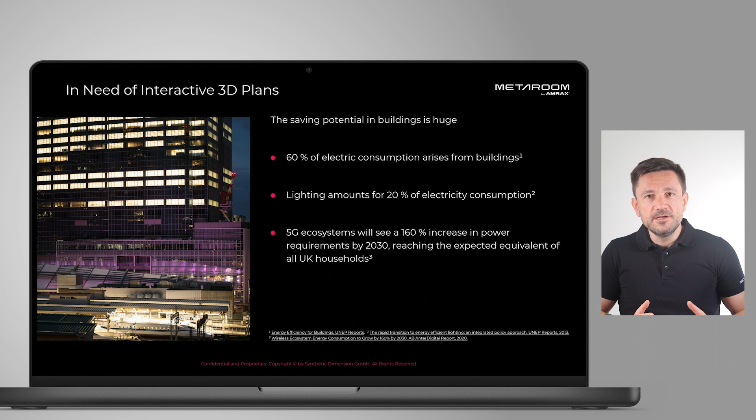In addition, we also consume a lot of energy via wireless networks, which is usually completely invisible and unrecognized by us. 3D plans help us enormously in understanding and simulating these energy consumers.

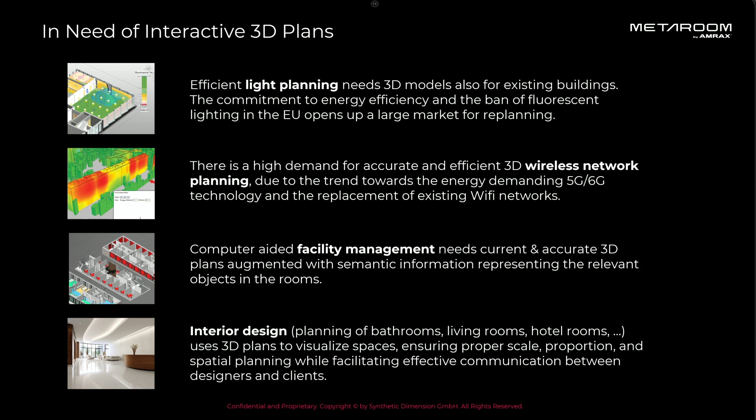So we can see this 3D data from buildings can be highly useful, not only for lighting, but also for many other areas, such as wireless network planning, facility management, and of course, various interior design applications.

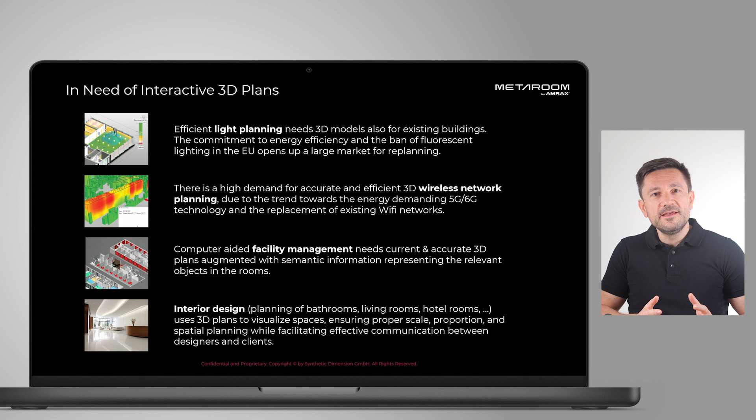Before we delve deeper into BIM and 3D capture, I would like to briefly discuss the distinction between BIM and other 3D data. I think it helps with further understanding and it also creates a focus. Let's take a close look at BIM.

Here we see at the top of the list of advantages that we are standardized, which is also the biggest advantage of all. Work has been underway to standardize BIM since 1997, and the latest version, IFC 4.3, has been official ISO standard since 2nd April 2024, making it the global standard.

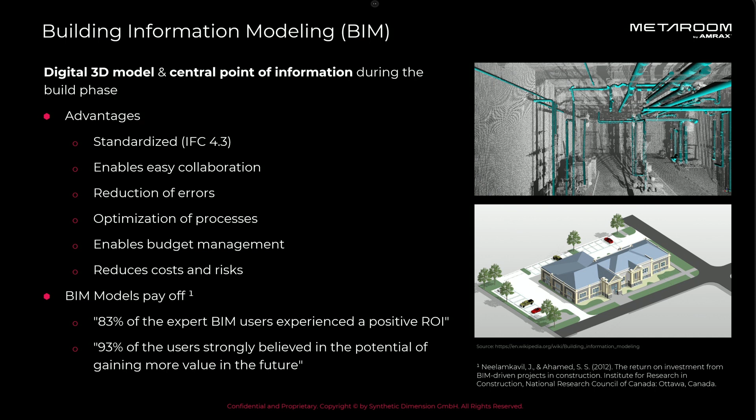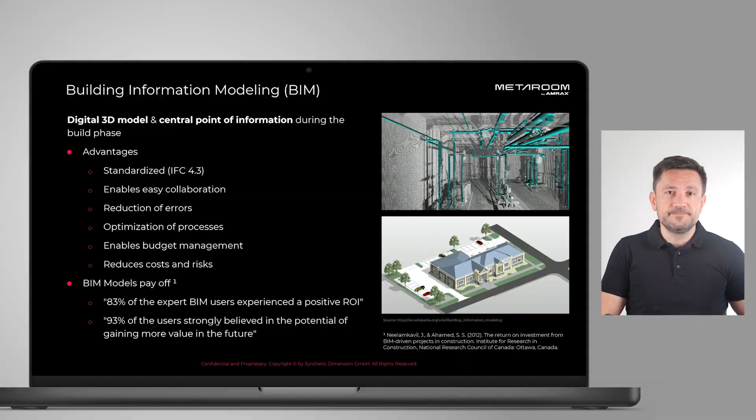The second item on the list is collaboration, which has many more positive effects, such as reducing errors and optimizing processes. And of course, this also pays off in terms of financial aspects. BIM literally saves money. Now, let's jump to one of the most important aspects, opportunities and challenges.

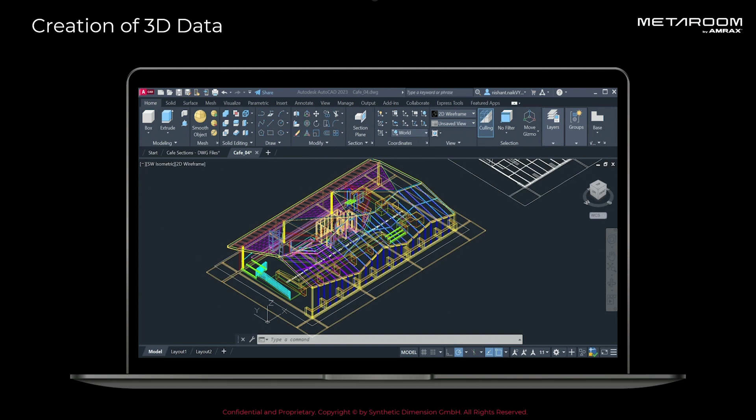As every new technology also comes with both sides of the medal, I think everyone knows such images, lots of icons, complex software. Almost every 3D process today is in extreme need of training and requires experts. The software packages can do almost everything, but can we do as much?

I once saw a study that we use an average of 2 to 4% of the features that Microsoft Word offers. I don't think it will be much different here, but sometimes you need just that one special feature.

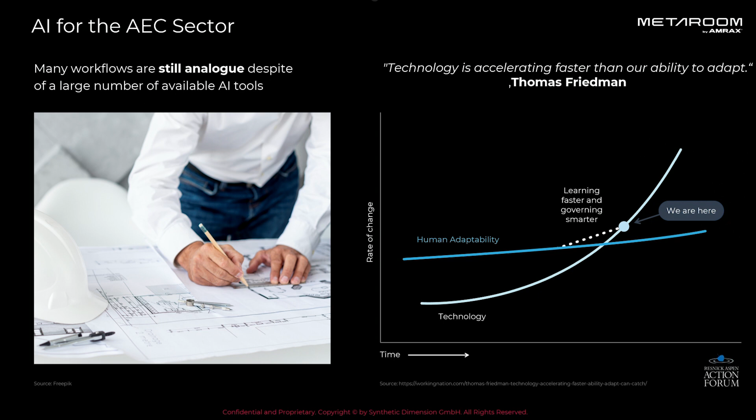We can also see that AI is also making its way into the field of buildings, and of course, into the field of lighting and lighting design. It feels a bit like so much is happening in the AI sector that we as humans can barely keep up. In the picture on the right, you can see a curve that I really like.

But the good thing is that AI not only makes things better, it also can make them easier.

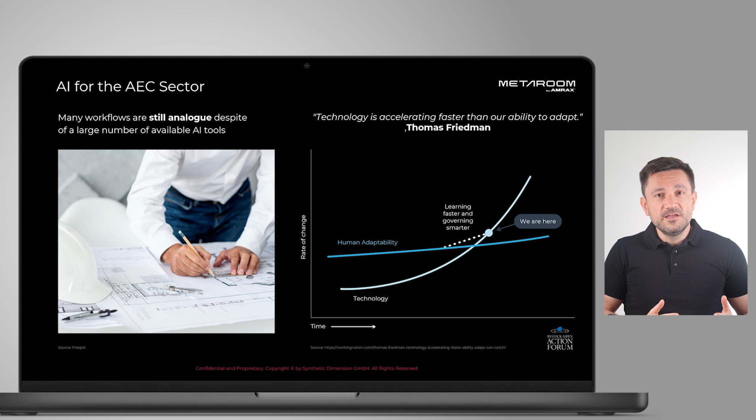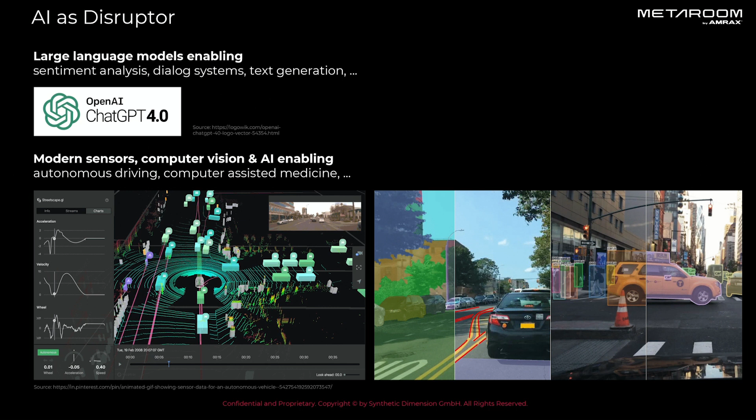In addition to large language models, I think everyone will have heard about ChatGPT. A lot has also happened in the field of machine vision. AI in the recognition of objects, but also in the estimation of depth, in other words, the third dimension, has been around for much longer.

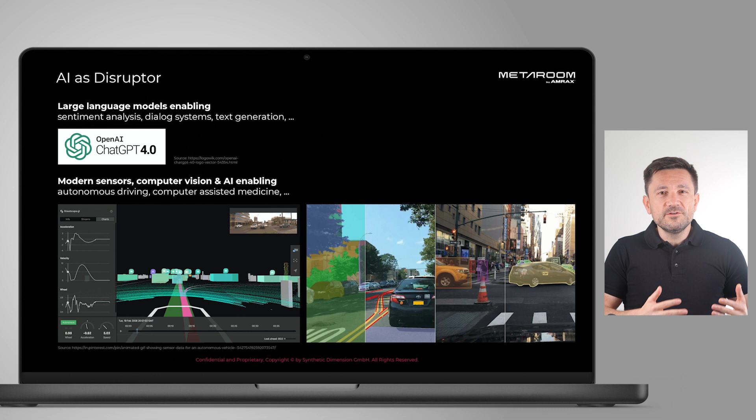You can imagine what I'm about to show you as the autopilot of a state-of-the-art vehicle, only on a cell phone.

The app I'm showing you now, METAROOM, can be downloaded for free on the App Store. So you can also give it a try on your own. Let's start a new scan together.

Right at the start, the system automatically recognizes walls, windows, tables, chairs. A total of 16 classes of objects. However, much more information is calculated in the background, such as the reflectance of walls, which plays a major role in lighting design. Typically, a scan of one room takes around 2 to 3 minutes.

There is no training necessary, but a bit of experience helps, like doing a couple of scans before we go out in the wild. We also record the 4 positions where existing luminaires are located. We can already see this in the overview, displayed as green icons.

Now we have successfully digitized one room. Basically, it can be said that there are no hard limits for the size of the recordings. It can be used to record entire floors and buildings. Now we jump into METAROOM Studio and take a look at the scan we have made together.

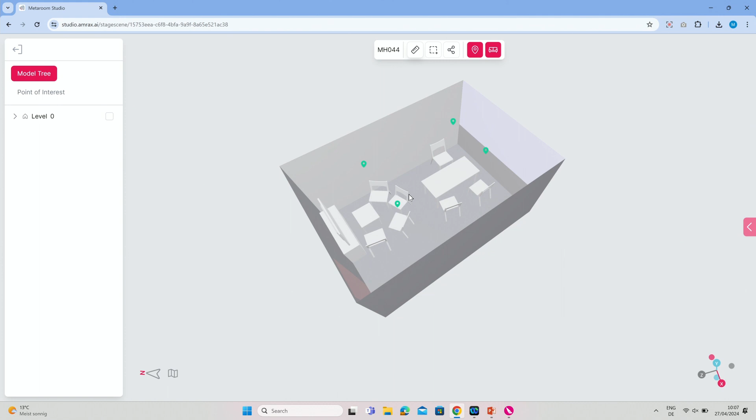Here, it is now possible to add more objects to rooms. We remember the additional recordings we made of the ceiling. With these additional recordings, the so-called points of interest, we can now generate the exact positions of the luminaires. Furthermore, we can assign the room usage type. We can see that a room assignment has already been made fully automatically.

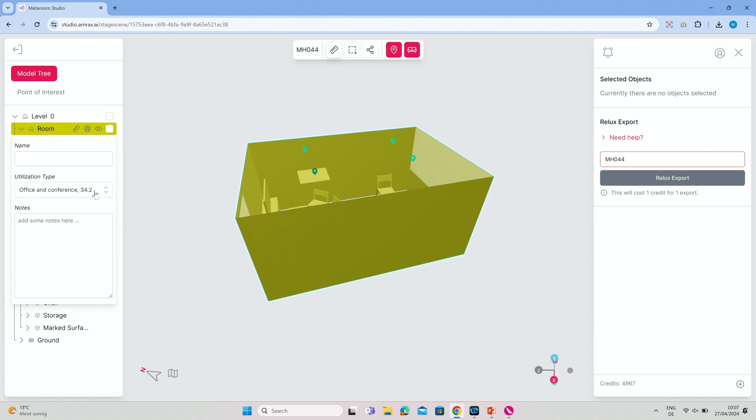If we are happy now, we can export it. That's what we are doing now. And now we open the automatically generated file in lighting design software, Relux Desktop in this case.

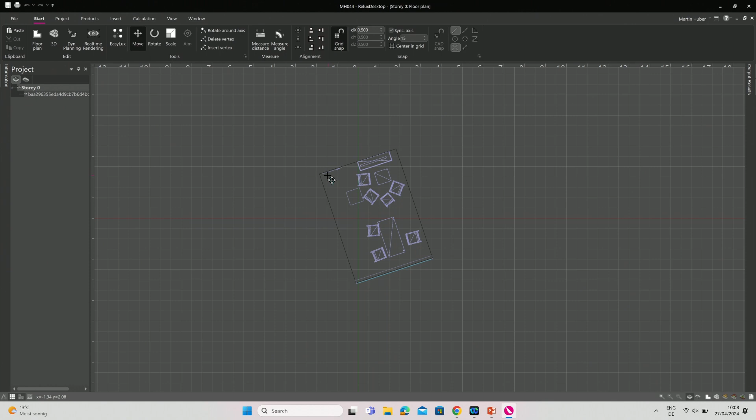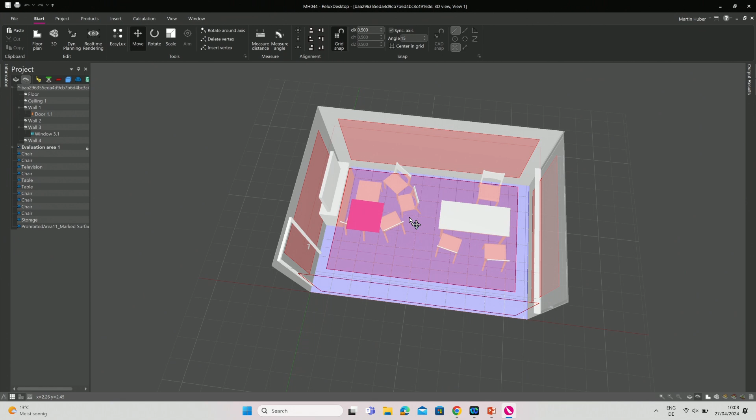So now we opened the exported file inside Relux Desktop software, and we can see this is not only geometry, it is an intelligently created room, including the evaluation areas, also the reflectance of the walls, and all the objects we can see here on the left side in the model tree. Also the additional ceiling position, what we generated inside METAROOM Studio, can be seen inside Relux.

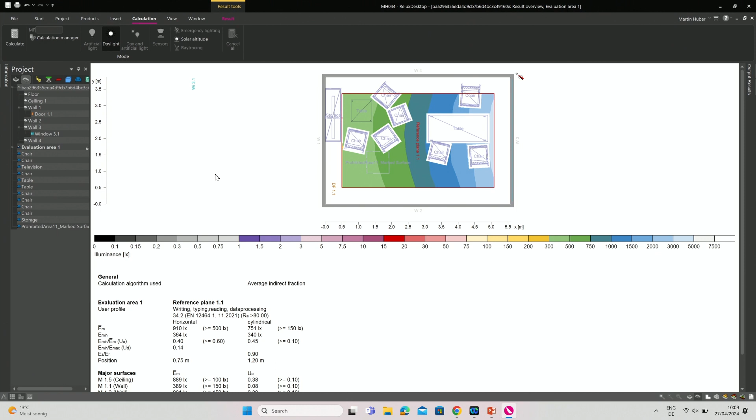And from here, we can just click on Calculate, and we can see that without any further manual adaptation, this BIM model, which has been created with the app, can be used natively inside light planning software to generate us a first calculation result. And here, the circle closes with the AI possibilities.

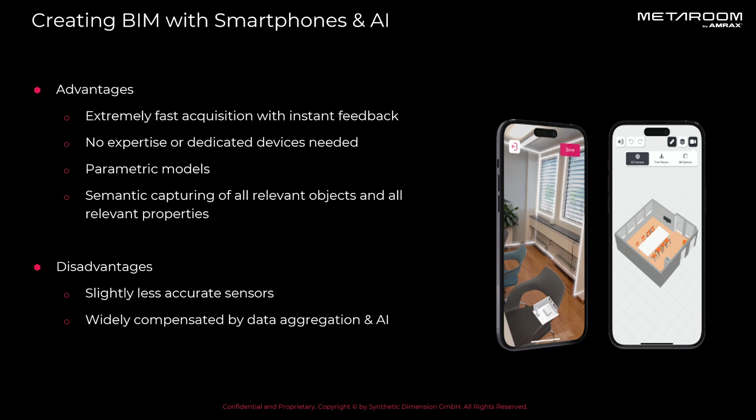In this case, we have not only experienced a new way, but also an enormous simplification. We no longer need expert systems to record a parametric model. In terms of accuracy, we end up with a system like this at around 5 centimeters, which can be seen as a disadvantage here, but in our experience, this does not play a major role in the field of lighting design.

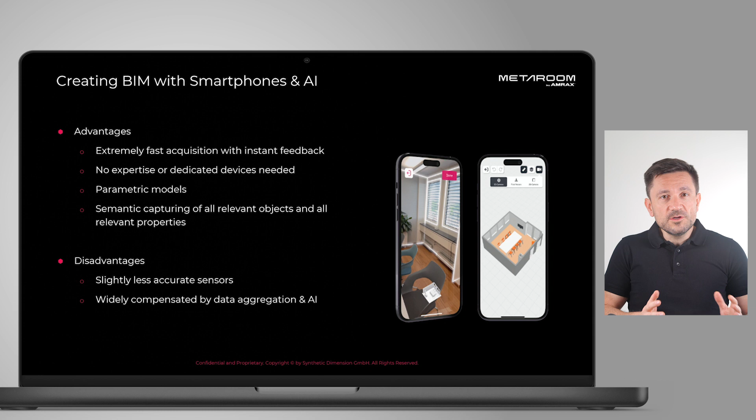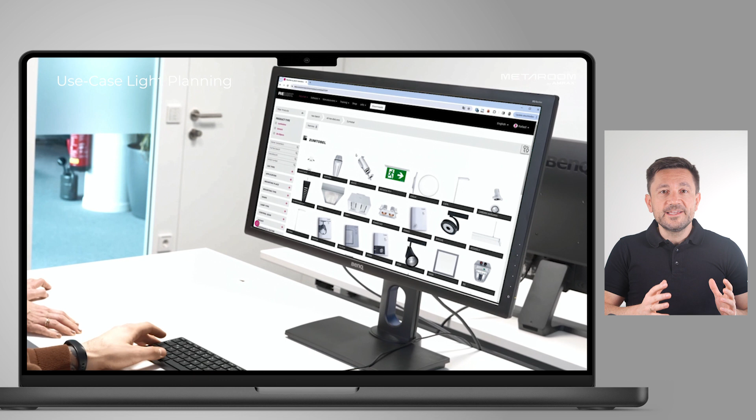The windows, doors, staircases, and also the existing luminaires were digitized. The data was then transferred to the Relux Desktop software, where it was calculated and run through in the new real-time renderer.